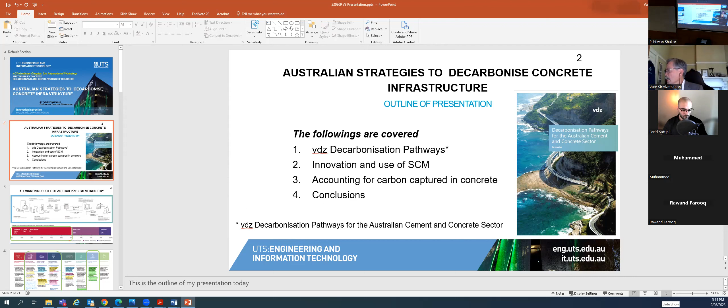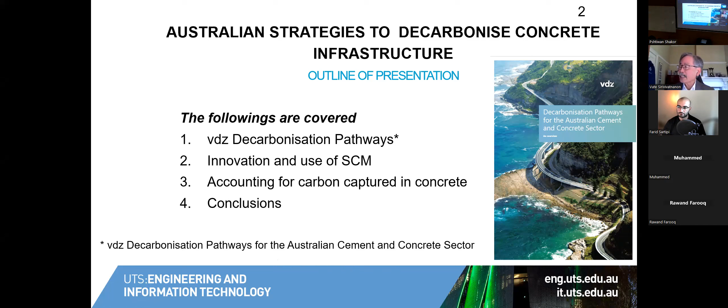The main area that I'll cover is the innovative use of SCM to decarbonize our infrastructures, before touching very briefly on what we are doing in accounting for carbon capture in our existing concrete structures, and then conclude today's discussion.

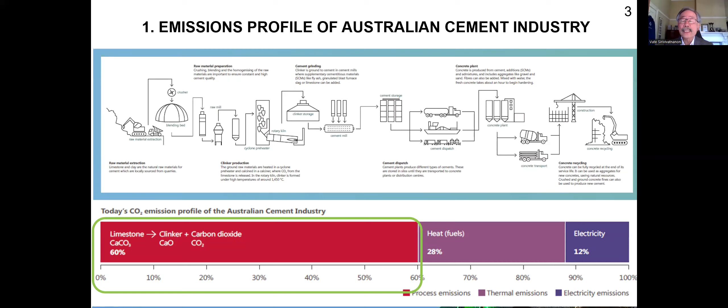Now, if we look at the emission profile of the Australian cement industries, you can see that 60% of the carbon is produced through what we call process emission. That is basically the calcination of limestone to produce clinker, and in that process CO2 is produced. But there's also heat and electricity needed to produce cement, accounting for roughly 30% and 10% of the total carbon dioxide emission. Today, what I will focus on is the process emission itself, this 60% emission.

Now, among the process emission, the VDZ report — VDZ is a company in Europe specialized in cement and concrete — this report was prepared by VDZ and supported by the Cement Industry Federation and Cement Concrete and Aggregates Australia. In the report, they identify some 21 plus 10 plus 3% of possible carbon reduction due mainly to the potential use of SCM in concrete.

So this is where I'll spend most of my time in today's presentation. We also have a little 6% carbon capture in terms of accounting for the concrete to actually absorb or take up carbon dioxide due to the carbonation process as well.

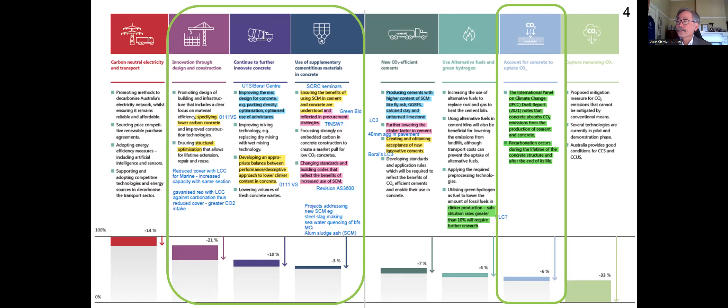So this is the area I am concentrating on. In this, I would share with you what we are doing right now to look at the introduction of low carbon concrete into transport infrastructure in particular.

We work with a Department of Transport in New South Wales, which in Australia we call Transport for New South Wales. This is possibly the biggest Department of Transport in Australia because New South Wales is the biggest state in Australia.

So we are working with them right now to establish a framework to expand the current specification that they have to capture low carbon concrete. This is done through looking at the specification itself, improving mix design, looking at the balance between prescriptive and performance-based specification, and finally introducing a new provision in the specification itself. So this is basically the framework we are working on right now.

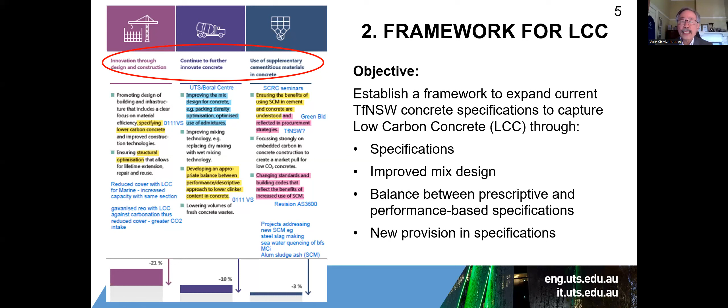Now, in specifying any concrete at all, you would be very familiar with this. Everyone basically specifies concrete for workability, for mechanical properties, and for durability properties. Durability properties are so important because these days we are looking at concrete with a specific design life, which is a very important part of sustainability.

But in doing so, I guess what we haven't got at the moment is a requirement on embodied carbon. That's what we're working on to say, okay, can we actually also specify embodied carbon so that we encourage the industry to use low carbon concrete to meet all the specifications that people are using.

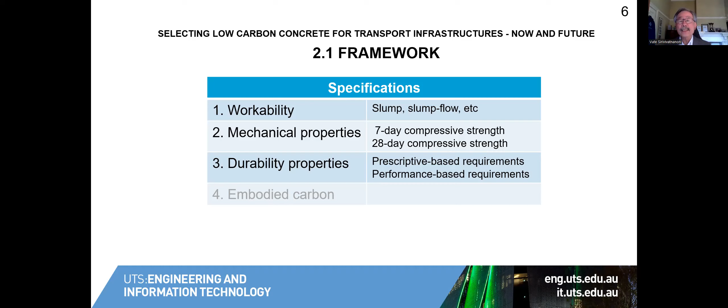To do this, we look at the embodied carbon of the concreting materials. This value may differ from place to place, but I think what's clear is that Portland cement is responsible for the highest amount of carbon dioxide per kilogram of material, roughly 0.93 kilogram CO2 per kilogram of cement used.

Now, if we can replace some of it with slag, which has basically an order of embodied carbon lower than Portland cement, that is 0.083. And if you also use fly ash, it's even another order lower than slag, at 0.008.

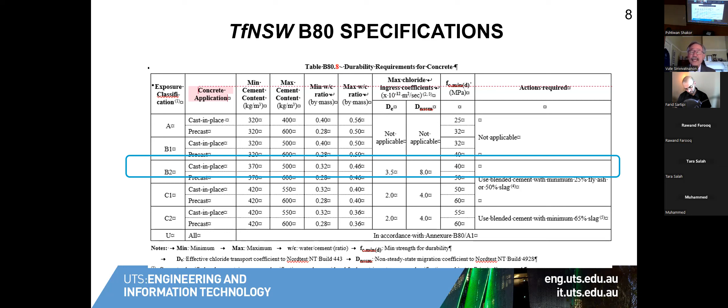So for exposure B2 cast in place that I pointed out, I'll share with you different concrete mixes: strictly ordinary Portland cement, a concrete with 30% fly ash, and a concrete with 50% slag, just to show an example. In this case, to meet the diffusion coefficient of 3.5, the best type of binder system is the 50% slag, which will require the concrete to demand an embodied carbon of around 125 kg of CO2 per cubic meter.

What about the strength requirement? With a grade 40 requirement, we are looking for a mean strength of around 45 megapascal. So in this case, slag also is the mix that will give the lowest embodied carbon compared to the 30% fly ash mix or the OPC concrete mix.

So to select the concrete which satisfies both the diffusion requirement and strength requirement, in this example we would have chosen a 50% slag blended cement concrete, which produced an embodied carbon of around 220. If you compare this to an OPC concrete, you'll find that we basically save about 30% of the embodied carbon. That's the potential that innovative use of SCM enables, to choose a concrete with the lowest embodied carbon possible which meets all the requirements.

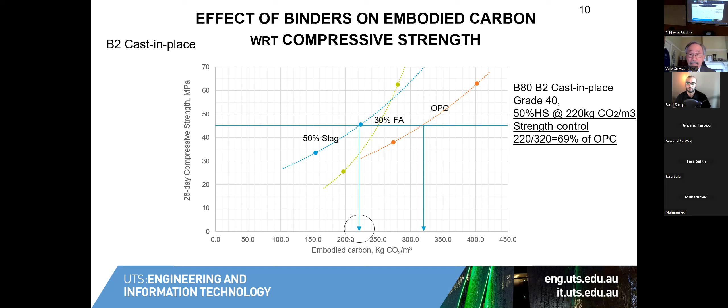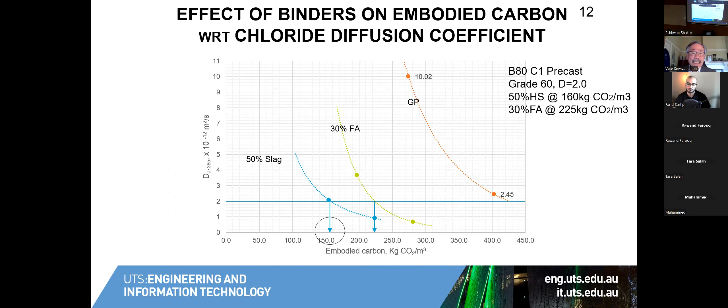I have another example, but I won't repeat it in full. In this example, the type of binder that meets the diffusion requirement and that meets the strength requirement are different, and at the end, a 30% fly ash would be the best concrete to use for lowest embodied carbon. So you need to understand the behavior of concrete very well to be able to select a concrete with the lowest embodied carbon that meets both the strength and durability requirement.

Am I going too fast at all? I would welcome any question so that I can clarify it as we go. Go ahead, Professor Vute, I guess at the end of the presentation everyone is free to ask. Okay, continue your presentation.

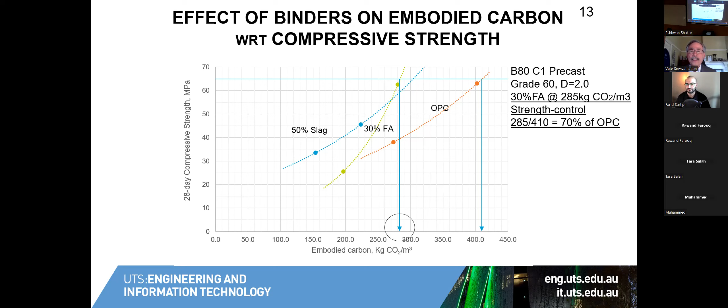Thank you. Now, what about the different exposure? That's exposure A and B1, which only have prescriptive requirement and strength requirement, but there is no durability requirement. What do we do there? Basically, if we stick to this type of specification, the embodied carbon is controlled by the minimum cement content, so there isn't much room for the concrete supplier to produce concrete which meets the performance requirement as well.

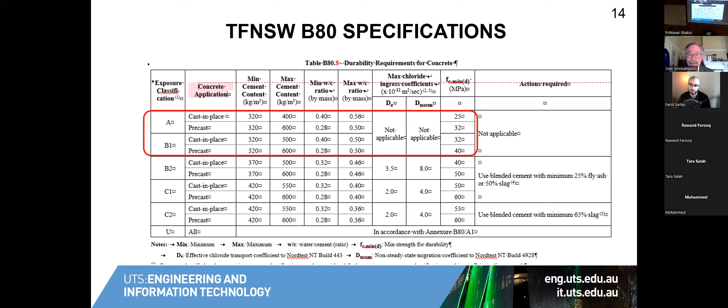So I will just quickly show this. This type of exposure usually refers to concrete that may be subjected to carbonation-induced corrosion only, not a marine environment situation. So in this case, although there is no requirement on the performance-based type of specification, we are doing some work to see that if we produce concrete which doesn't meet the prescriptive requirement, can we also meet the durability requirement? In this case it is carbonation-induced corrosion.

For a structure with a design life of 100 years, under carbonation-induced corrosion, it is very safe to design the structures with an initiation period of around 80 years and a propagation period of 20 years, making up 80 plus 20, the 100-year design life. In this case we are looking at different concrete and different carbonation depth. To get carbonation-induced corrosion resistance, we need the quality of the concrete as well as the cover depth, which will control the design life of the structures.

I'll just show you this example without going too much into it. Basically, under the current prescriptive requirement, we would only be able to meet the requirement for in situ concrete, which provides greater cover than precast concrete, which demands lesser cover type.

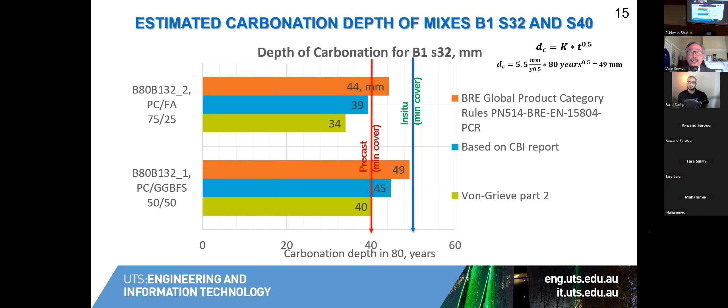So very quickly, conceptually, I won't have time to go into detail, but basically to look at how perhaps we can introduce a performance-based requirement to enable the producer to come up with a novel solution which satisfies the performance requirement and perhaps does away with some of the prescriptive requirement in terms of minimum cement content, because it's the minimum cement content that largely controls the embodied carbon.

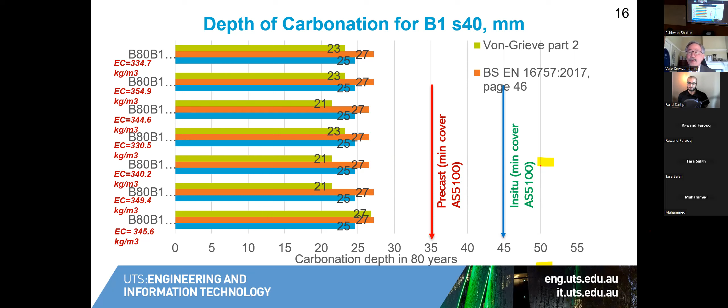Now, most of this would be concrete with high SCM content that may be subjected to high carbonation. So all this work is to enable concrete with high SCM to be designed to meet the performance requirement. The example I show you right now is the effort to, at the end of the day, include the requirement in the specification in terms of the embodied carbon, an embodied carbon level that can be supplied by concrete manufacturers which satisfies three main requirements we always have: workability, mechanical properties, and durability properties related to the design life that we need. I stress that strongly.

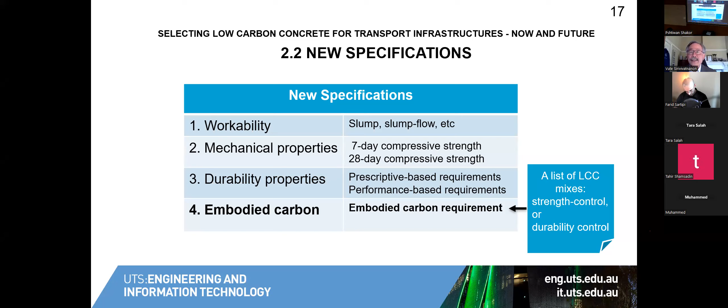Now, to look at that, there are a lot of things we need to consider, which I've explained during my presentation. In the case of strength control for embodied carbon, can we use strength as an indirect control for durability? Was early strength or 28-day strength more important? This is quite important because for precast concrete, concrete suppliers do not produce concrete just to meet the 7-day and 28-day strength requirement. They actually develop concrete that meets the strength requirement for them to strip their formwork, which means a strength at perhaps 8 hours after casting, so they can reuse the formwork again and again, which is also part of the embodied carbon in the production of concrete.

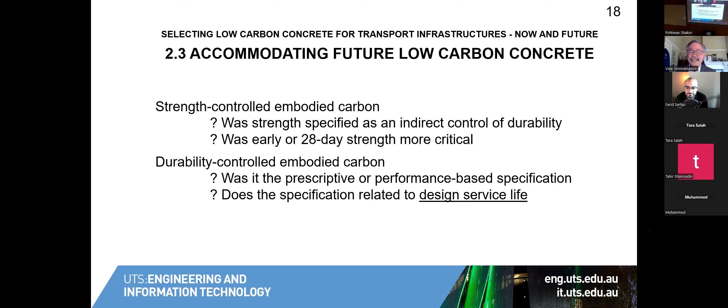So, yeah, there seems to be a lot of noise here. I'm so sorry, Professor Vute. Yep, that's all right. I'm just sorry that maybe some people... Actually, I've asked many times to put their microphones off, and I will ask them again. That's okay. I just don't want people to miss some of my presentation. Yep, okay.

Now that's the bulk of my explanation. The other 6% I mentioned at the beginning as a pathway to reduce our carbon is the uptake of CO2 into the concrete. Traditionally, we've looked at carbonation as a devil because it may lead to carbonation-induced corrosion, as I shared earlier in terms of specification. But with appropriate specification, we can actually make use of carbonation because, in a way, the concrete structure is a carbon dioxide sink, a carbon sink. We are now working toward accounting for the CO2 that our structures are actually absorbing. These are very important data because this is what the Intergovernmental Panel on Climate Change, hopefully with data available from different countries, will propose as part of the carbon capture from our concrete structures. So concrete has always been looked at as basically the devil in producing CO2. In fact, concrete structures are also doing good in absorbing CO2, similar to plantations and so forth. So this is also the type of work we are doing right now.

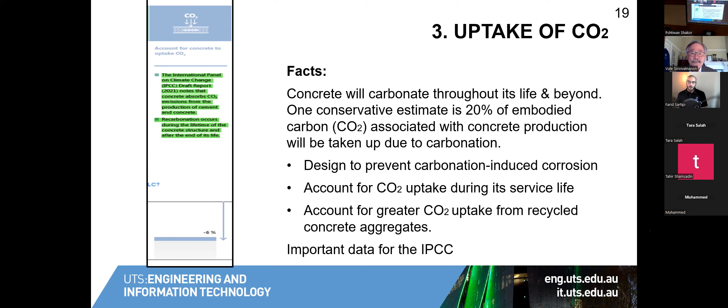So I'll just conclude my presentation. At the moment, our strategy is that we will look to specify embodied carbon in our concrete specifications, as I explained. In some cases, especially in carbonation-induced corrosion issues, we would be looking at the development of performance-based specifications to tackle this issue and also to enable novel solutions to lower our embodied carbon. And finally, to account for the CO2 uptake as part of the carbon sequestration that would be used by the IPCC, the Intergovernmental Panel on Climate Change, to put, I guess, the positive image of concrete rather than the negative image everyone talks about. So that's the end of my presentation. Thank you very much for your attention.

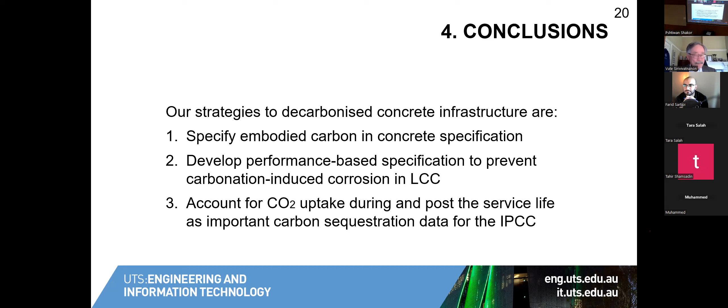Yes, of course. Stop sharing. Thank you so much, Professor Vute. Of course, all your research contribution is not hidden from anyone in Sydney and internationally, everyone knows. I just had one question actually.

As you've mentioned, durability performance of concrete is crucial when we're talking about sustainability, and one of the factors you mentioned was diffusion coefficient. I'm just not aware of this, what is diffusion coefficient? So the question is, what is chloride diffusion coefficient?

I guess one of the most severe deteriorations for concrete structures is due to chloride-induced corrosion. Now, the transport mechanism for chloride into concrete is through a process called diffusion. Diffusion is a process where an ion moves from one area to another area due to the difference in concentration of that particular ion. So for marine structures, exposed to sodium chloride mainly in the seawater, the surface of concrete is subjected to a fairly high amount of chloride ions. Whereas inside the concrete, the chloride ion is controlled to nearly a zero level. So this process of chloride transporting into the cover depth can be measured by this factor called diffusion coefficient.

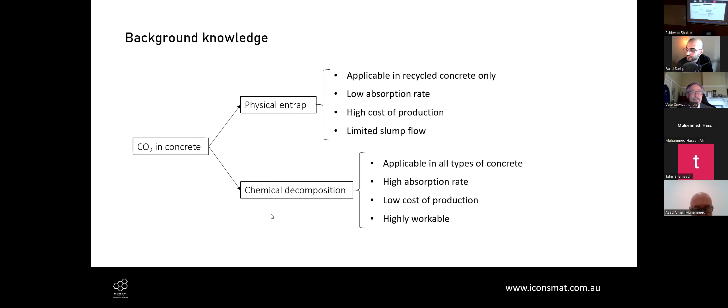Moving on to the next slide, I'll be talking about how we source CO2 gas. So we know it's good to use CO2 in concrete, but how can we find CO2? That's the topic of the next few slides.

Capturing methods are, especially in Australia, we have to take a step back and see what are the main sources of CO2 emission. In Australia, it goes back to coal power plants. Major electricity providers source energy from coal power plants, and that's the main source of CO2 emission. If we implement some technology at these coal power plants to absorb that emitted CO2, we can make sure CO2 emission would be much less.

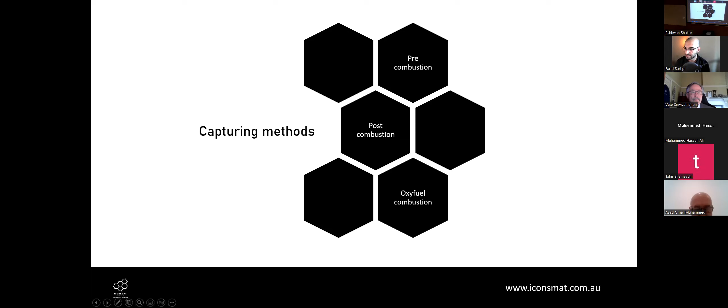So we have pre-combustion, post-combustion, and oxy-fuel combustion, which are the three main methods studied by CSIRO, Commonwealth Scientific and Industrial Research Organisation. Each has its own unique characteristics, but before we know which technology is more effective and the details of each of those three capturing technologies, we have to know what the coal power plant looks like.

There's a feed of coal that goes inside the boiler. The coal is burned. It boils the water, the water steam goes into the turbines, and the turbines generate electricity. Caused by the burning of coal, there is a lot of CO2 gas being emitted into the environment. That's where we can focus, like this chimney right there - that's normally called the flue gas. That's where we can source our CO2 and put it to good use instead of letting it be emitted into the atmosphere and cause global warming.

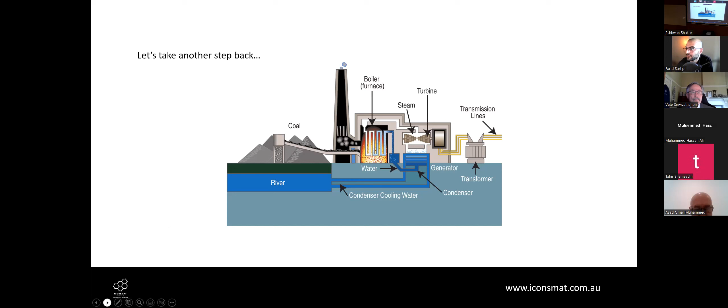Pre-combustion carbon capture is one of those effective methods that is proven to be, at least theoretically, effective. It is schematically shown here. The pre-combustion methods are chemical procedures involved in the steps before fossil fuel combustion, in this case coal. These are usually chemical gasification of the input coal, aiming to lower the amount of CO2 emission.

So we have coal, and we have to gasify that before we burn it. In this process, coal is combined with oxygen to produce a gas made up of carbon monoxide and hydrogen - that combination is also called syngas. By adding water to the syngas, CO2 is produced and captured while the hydrogen is burned to generate power.

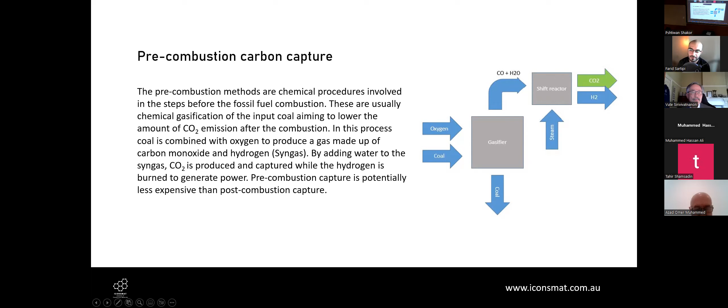Pre-combustion capture is potentially less expensive than post-combustion capture. So in such technology, we're not going to burn coal directly - or maybe they will burn coal, but what causes the CO2 emission and absorption as a result is the syngas that is burned and produces the CO2 for us. We capture it and use it in concrete, since we're talking about concrete. It can also be used in other forms, like fire extinguisher capsules, but we're just focusing on concrete.

Post-combustion carbon capture is the main method we've used for the chemical decomposition of CO2 into concrete. Fuel and air go inside the boiler. Flue gas contains 15% CO2 and 70% nitrogen, and through a process called amine treatment, we combine CO2 with a substance called monoethanolamine, diethanolamine, or triethanolamine - these are some amine absorbents. There are also other methods introduced for absorbing CO2 by membrane.

Mainstream capturing methods are listed here. You want to write them down. It's a good way to source CO2 and

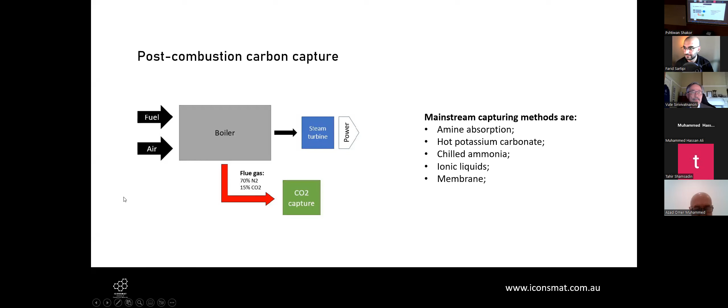let me refer to the notes, so that I can be really accurate about the referencing, as this is really important in academia, that the metal-mediated electrochemical process to harvest the CO2 absorption enthalpy can reduce the energy consumption. That sentence itself, I guess, can be a PhD thesis. Anyway, there's another way also to reduce the cost of implementing this post-combustion carbon capture.

Oxy-fuel combustion carbon capture is the third method to absorb or capture the CO2, or source the CO2. In simple words, we are burning coal at exposure to nearly pure oxygen, and that emits a highly concentrated CO2 instead of having nitrogen in the syngas or flue gas. We're having a complete CO2 concentration, so it will be easier to capture and absorb the CO2 later on.

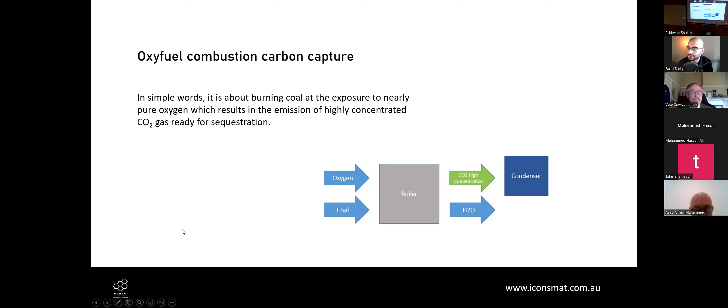Another really important way of capturing CO2 is to focus on our own industry, being construction. We have a really polluting production process in construction called cement production. Cement production causes a lot of CO2 emission, and that's how we can approach it. That can be another possible way to reduce the total CO2 emission. So far, we know how to find and source the CO2 that needs to be converted into some other chemical forms rather than being released into the atmosphere, causing global warming and other harmful effects.

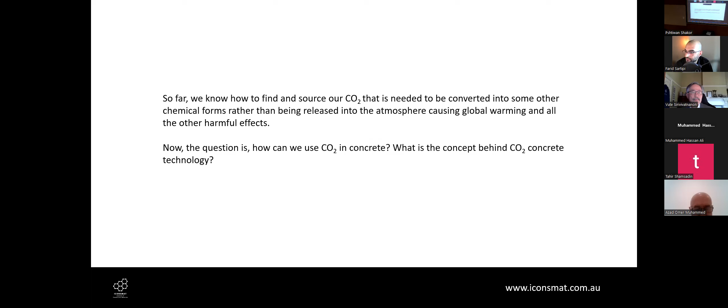Now, the question is, how can we use CO2 in concrete? What is the concept behind CO2 concrete technology? It's been referred to as physical entrapment and chemical decomposition. Those are the two latest technologies, but recycled aggregate has been around for, I guess, 20 to 30 years. It's one way to recycle construction and demolition waste. Recycling is always known as an environmental process, and we're getting pretty good results from recycled aggregate in concrete.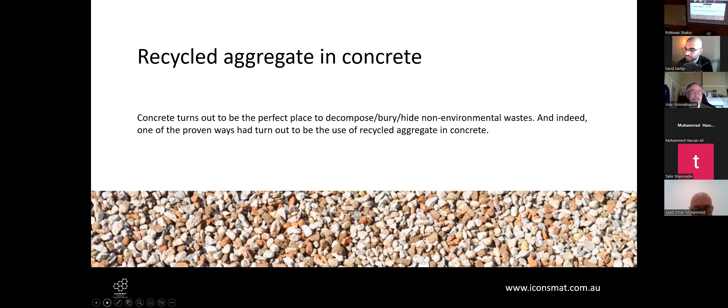Low-rise buildings can be built, like buildings as high as 1 to 3 levels, easily built using recycled aggregate. We can get up to 40-50 megapascals by having the right mix design. Something called geopolymer is where you can basically eliminate cement in concrete and use only fly ash and slag, which was the focus of Professor Vute's research projects as well.

But there is a bit of a safety issue in using geopolymer, as we are going to work with a highly basic liquid, sodium hydroxide, with a high molarity, which has to be used in combination with fly ash and slag to create geopolymer. That's not something safe to be done on site.

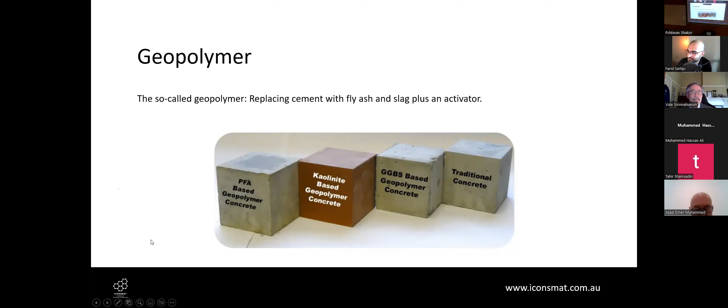Also, since it eliminates cement use in concrete, cement manufacturers are hugely against it. Cement manufacturing is a $1 billion business in every country, so it's not easy to just say, okay, we're going to stop using cement, and have a $1 billion industry say, okay, we're going to stop it today. But still, it's there—geopolymer will get the same results without using cement. If at any point in history, in the future, humanity decides not to use cement, that's the way to go.

So I've explained these two ideas, and I guess my time is over. If there are any questions about the research, I'll be more than happy to answer.